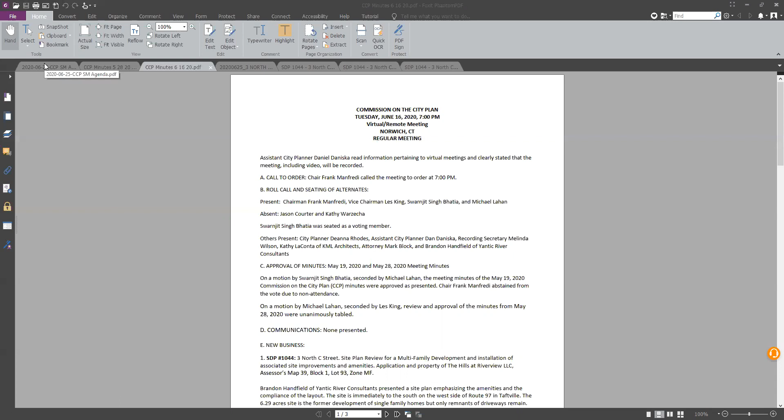Any opposition or abstentions? There being none, let's go to the—what was the other date? The agenda's off—the next date of the minutes is from June 16th. Okay, so we'll entertain a motion to approve the June 16th meeting minutes. I'll entertain the motion to approve June 16th meeting. I'll second the motion. Okay, who did the second? Michael—Mike, I did. Yeah, Michael did the second. Okay, and all those in favor—any errors or omissions? Any discussion? All those in favor signify by saying aye. Aye, aye. Are there any opposed or abstentions? Okay, there being none, let's go to the next section of the agenda.

Communications: none, no communications. New business: there is none on the agenda.

Old business: site development plan number 1044, 3 North C Street. Site plan review for the multifamily development and installation of associated site improvements and amenities. Application and property of the Hills at Riverview LLC, Assessor's Map 39, Block 1, Lot 93, Zone Multifamily. This was tabled from the 6/16/2020 Commission on the City Plan meeting, and so we are back to complete and look at some of the questions that we had from the last meeting.

Sure, Les, if you don't mind, can I jump in? Absolutely, Deanna, go right ahead. Okay, so at the last meeting on the 16th, we had gone over a few of the comments from my first memo, and there were some questions regarding the architectural style of the buildings and sidewalks and things. Since that time, the applicant's engineer and architect have worked diligently on the plan and have revised it according to your comments, the city engineer's, and my comments.

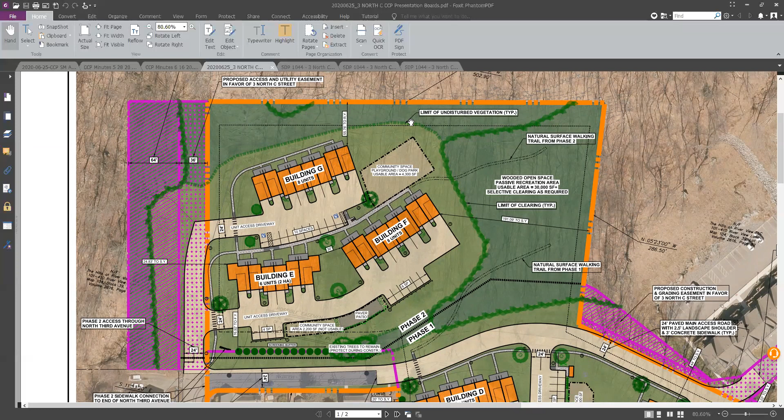While we're on the recreation, I don't know, Dan, can you go to the next sheet 3? It's a little, I think it's a higher scale. It's about the same, but we can start in phase 2. So we discussed briefly, as part of the sidewalk interconnection and pedestrian interconnection, was improving the amenities for every grouping of building. So starting in phase 2, since we're on it, you'll see the community space in the northeast corner between G and F has gotten significantly larger.

And that area there will be created to provide a relatively flat dog park and an area for a playground to be constructed. And the reason for the wider sidewalk there is to make sure that everybody within the development can access that area and the guidelines.

Further to the right, you'll see in magenta a small trail that leads from the community space into the wooded area. That again provides a meandering natural surface path into that wooded area to allow for more of a passive recreation such as hiking or picnics.

Moving down below E and F, that recreation area has not changed. But what we did change is it's not included in the compliance of community space or recreation area because it's only 20 feet wide, not 30. But we did keep that as it does provide view sheds over the development towards the Shetucket River and the Peninsula.

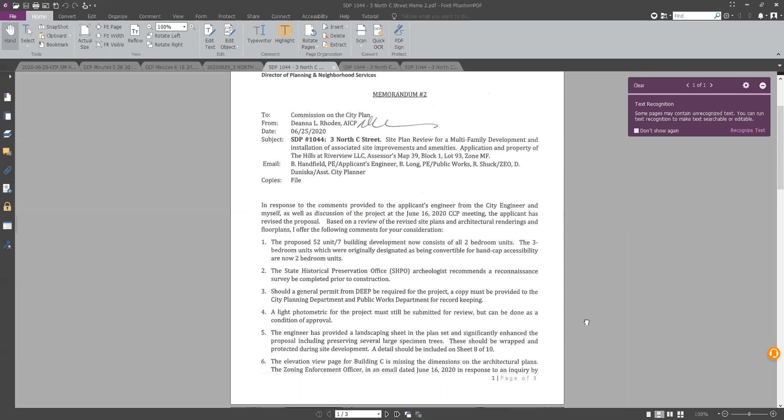The second comment is the State Historical Preservation Office archaeologist now recommends a reconnaissance survey be completed prior to construction. Brandon responded they do have someone on board that they're going to be looking at it. We have a memo from him too, but my comments are in response to his memo, so this is the most updated.

Should a general permit be required from DEEP, which may be the case, we wanted a copy of that for our files and for Public Works record keeping. The light photometric for the project must be submitted, but we're okay with doing that as a condition of approval prior to filing the Mylars. We don't think it's going to be an issue based on the light fixtures they're proposing and where they're proposing them, but we do want that.

The landscaping sheet was what was requested. There wasn't one before. It significantly enhanced the proposal, including preserving those large specimen trees. I noticed that there is no detail for protection of those trees during construction, so I'd like a detail included on sheet 8 of 10.

Then the elevation view for building C - we have updated architecturals, and we could show those in a couple minutes too for you. Because what Kathy the architect did is she updated them so you'd see how the elevations actually look. And building C is the only one that's missing dimensions on the architectural plan.

Also in response to an inquiry by Brandon Handfield about the proposed building heights, we wanted to make sure we were comfortable with the height of the building and that it did meet our regulations. The ZEO has confirmed that it does meet our regulations for how we define height, and they fall beneath that 25-foot maximum height, which would require additional buffering, so they don't need to do that.

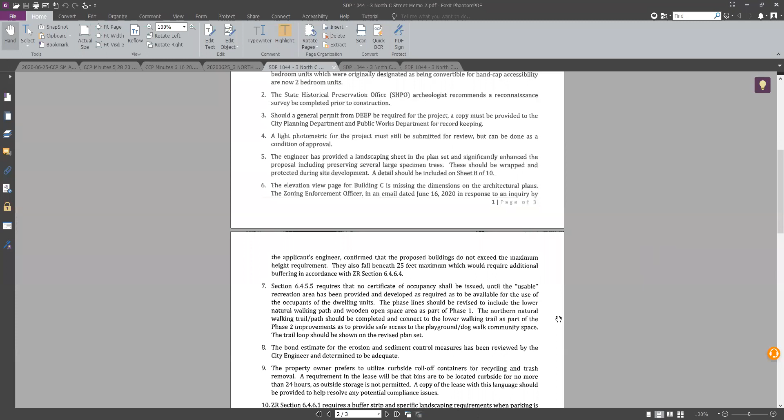The bond estimates were fine for the phases, reviewed by the city engineer, and he feels they're adequate. One of our questions was about utilizing curbside roll-off containers, because it's been an issue in the past with people leaving them out all the time in some of these developments, and we receive a lot of complaints about the aesthetics of that.

Their response was that a requirement in the lease will be that the bins are located curbside for no more than 24 hours, since all these units have garages and outside storage isn't permitted. We'd like a copy of the lease with that language in it, so that can help us resolve any potential compliance issues, and we can be in contact with the owners of the property if this becomes an issue, because we do get a lot of phone calls about trash containers on other sites.

Number 10 is about the buffer strip that Brandon talked about. Section 6.4.6.1 requires a buffer strip and specific landscaping requirements when parking is closer than 15 feet to the property line. However, the commission may alter that requirement when requested by the applicant—it's not a waiver, just an altering of it, when in harmony and warranted by the regulations.

I'm going to quickly read that section for you. It's very short: this requirement may be altered by the commission on the city plan when conditions so warrant and would be in harmony with the intent to effectively screen vehicular parking from adjacent residences, but in no case shall the landscape buffer strip be less than 5 feet wide.

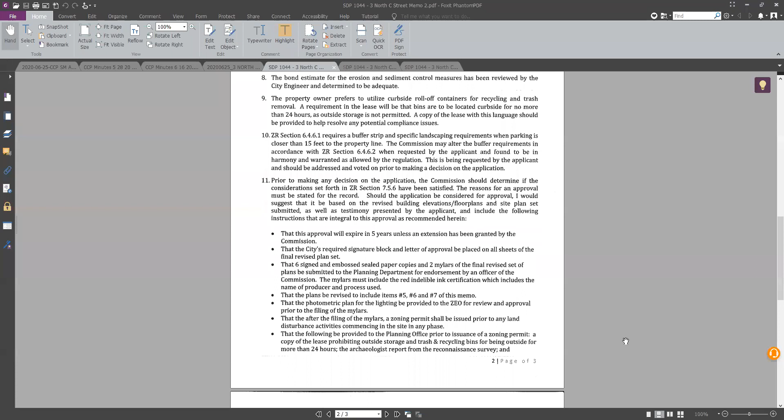The following be provided to the planning office prior to issuance of a zoning permit: a copy of the lease prohibiting outside storage, and trash and recycling bins outside for more than 24 hours, and the archaeologist report for the reconnaissance survey.

And submission of the required erosion and sediment control bonds, with the amounts being $53,800 for phase 1 and $67,800 for phase 2.

Then a copy of the DEEP general permit if it's required for stormwater and dewatering of wastewater for construction. Brandon said they may not have 5 acres at a time opened up, but if they do need that, we want a copy.

Typically, modifications of the approved plan be reviewed by the zoning enforcement officer prior to anything occurring, and it might require going back to the commission. We want a pre-construction meeting with planning, public works, and NPU.

E&S controls have to be installed and inspected by the ZEO before any land disturbance. No certificate of occupancy shall be issued until the trail up to and into the wooded passive recreation area has been provided and developed so as to be available for use by the occupants of the dwelling units, because that area is considered their usable recreation area.

All the proposed improvements have to be completed in accordance with the plan, or bonds have to be posted for those improvements in accordance with the regulations. The commission may require as-built certification by a licensed engineer or land surveyor should it be deemed necessary by the city to demonstrate compliance with any aspects of this approval.

I have one more that I was just writing to myself, actually two. One is that the access, utility, maintenance, grading, and construction easements shown on the plan, the legal documents be prepared and provided to the city for review, and get filed prior to the filing of the Mylars. And then the commission can discuss if they want to extend that landscaping along the east side of the community space below, I think that's building A. Yeah, building A. Those are the other comments that I have.

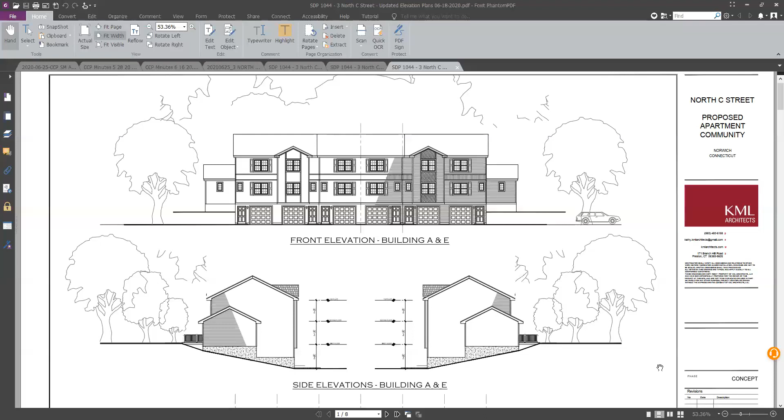I don't know if there are other questions, since you can't see the other side of the elevations. If you pan down, you can see the back elevations where there's an entry from that area onto a deck. There are a couple steps in some places to accommodate the grades; in other areas they may actually be on grade. This is one of the typical, we call it rear elevations, but the intent was not to have it really be the rear of the building — it was also to incorporate some of the front elements you'd see.

Can I ask a question? Certainly. Hi Kathy. What is the vertical line between the second floor and the first floor? The horizontal banding, you mean, with the vertical lines? The horizontal banding is just a change in material or perhaps a siding style, because that's also where there's an overhang from the second level. The dotted vertical lines actually delineate the units. Oh no, I meant the horizontal line that has the little vertical marks. Okay, that's all I was wondering.

Yeah, so that's just going to be vertical siding, a change in material. What is it going to be? Well, it could be a siding, it could be fiber board — those detailed decisions haven't been made. But again, that's an area where the gables are, where there's a cantilever, so the idea was just to break up that element.

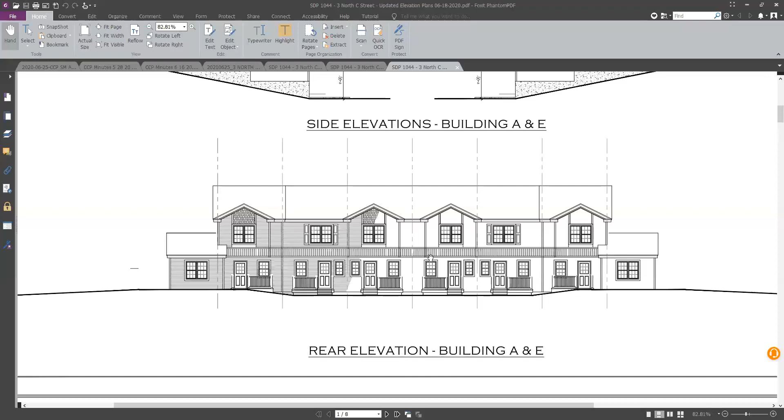Dan, move the page down so you can see the cantilever, if you don't mind. Oh, you can't. Yeah, you can see it on the front side, on the garage side. All right, thank you Kathy. You're quite welcome. Any other questions for Kathy? Okay, thank you very much, appreciate that, nice job.

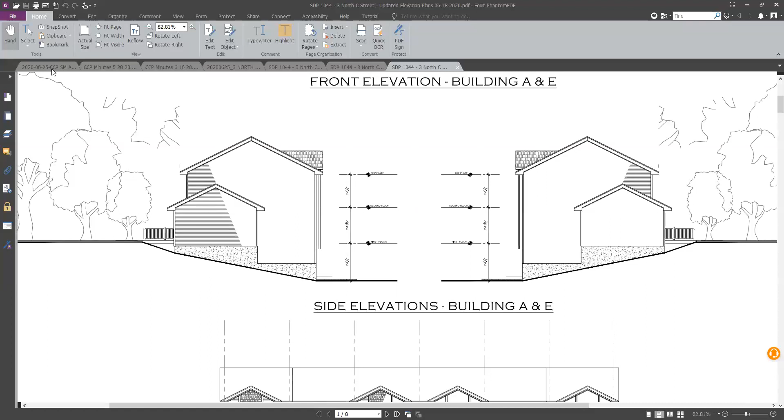So if the commission is comfortable, the first thing they should do is address whether they're comfortable altering that buffer from 15 to 5 feet. If you could bring the site plan back up, Dan — it's down in that area, around building A and building B. That's where the altering is necessary, Brandon, is that correct? Yeah, that's where the landscaping for the TVCCA goes right up to the property line, so by cutting the trees down we can add back in the buffer. All right, then I would move that we waive that line to the 5 feet request.

Okay, can you use the word alter instead of waive, that we can reduce and alter the 15-foot requirement down to 5? Okay, then the motion is that we alter or reduce the buffer strip down to 5 feet.

I'll second it. Okay, we have a motion and a second. Is there any discussion?

Just a quick question. What types of trees are those? I know you said there were some, what are they? Dogwood ones, but what are the other ones? They're evergreen? Yeah, those are called green giant. They're a deer resistant species that gets to 10 or 12-foot diameter pretty quickly. Okay, that's all I wanted to know.

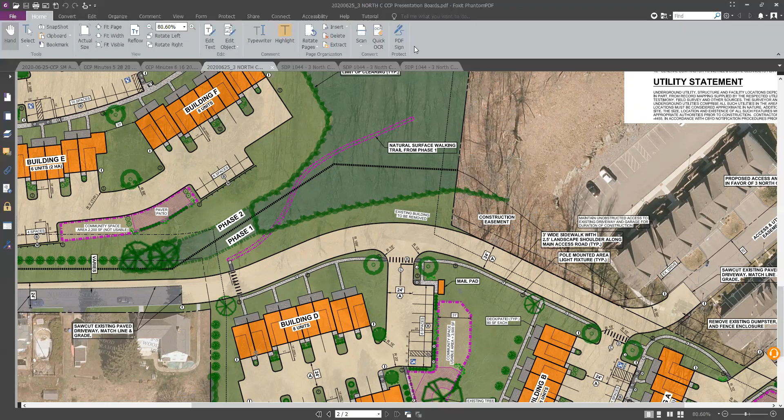But if the commission agrees that the trail system in the wooded area, can you pull that down, Dan, so I can see what it's called? We call that the wooded recreation area. The wooded recreation does not occur prior to the COs for buildings. Go back up again and move the page so I can see that, COs for buildings C and D.

Does that work for you, Brandon? Yeah, and also the isolated community space for C and D, if we could build that as part of C and D, that makes sense to me. All right, if everyone agrees on that in the commission, I'm comfortable with the C and D recreational space.

Obviously you can't make that for the first buildings, A and B, but the lower portion, that landscaping below A and B should be done, and the landscaping next to D and C, and the trail into the woods, should be done for COs for D and C. Yes. Okay, that sounds reasonable.

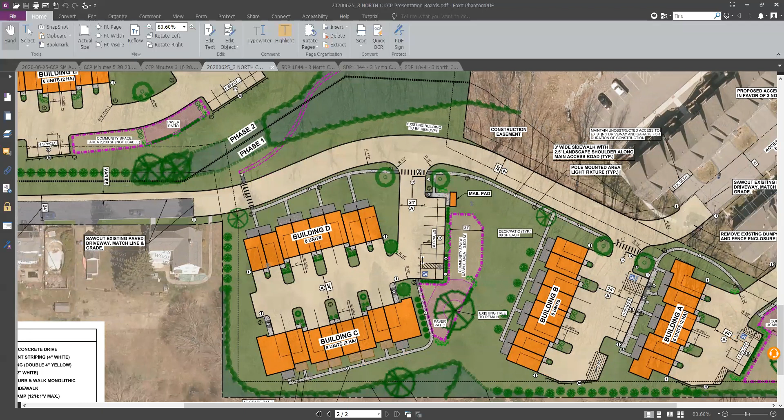The northern trail shall be completed and connected. So the phase line should be revised to include the walking trail as part of phase 1, built prior to CO for buildings C and D.

That's reasonable. I'll make sure we meet the intent when I write it up. I'll give Melinda exactly what we're discussing, these changes, and send them to her for the minutes, so I'll tweak that wording. Sounds good, thank you.

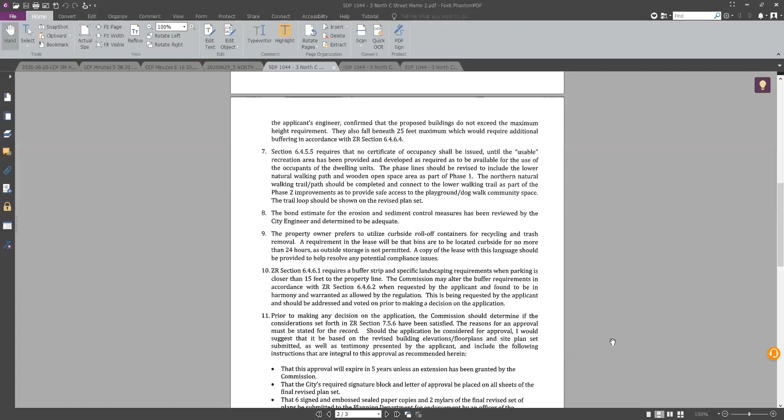And we're also okay with extending that landscaping along Route 97. Okay, great.

I guess we're ready to entertain a motion. I'll make a motion that the application be approved with the modifications as discussed, which is changing the phasing line and the associated recreation space for each building, for each phase of the building, be constructed during that phase of those buildings, and that the trail lines also have to be incorporated into and constructed prior to a CO for A, B, C, and D. And then extending the landscaping along the front by Route 97. Is that all that's changed, Deanna?

Also that the access, utility, maintenance, grading, and construction easement documents be prepared and provided to the city for review and approval, and that they get filed at the time of the Mylars. And then all the other issues. So that's my motion.

Jason, I'd like to second that motion. Jason seconded it, okay. And any discussion?